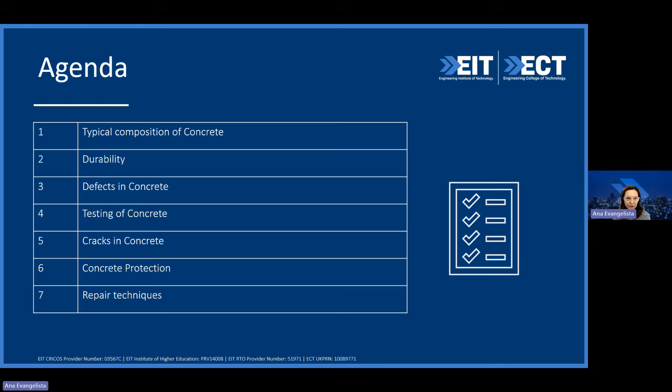So the main point today is to understand deterioration in concrete, because you have existing structures and sometimes new constructions showing significant defects and deterioration in a very short period of time. Just to highlight, when we talk about concrete here, concrete is a composite material.

At the end of the day, we need to understand the characteristics of each component. I'm sure you're totally familiar with this material, because concrete is one of the most used construction materials around the globe. It's a combination of cementitious materials, normally combined nowadays with cement Portland plus any type of pozzolanic material such as fly ash or silica fume, depending on the country. We also have fine aggregates. We cannot forget air is part of our composite, water, and coarse aggregates.

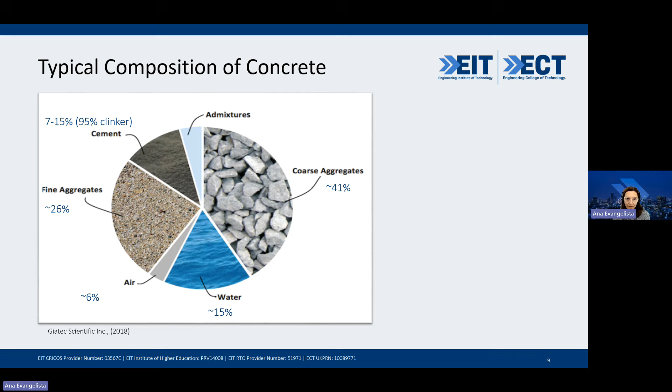Usually, modern concrete incorporates chemicals, right? Chemical admixtures and mineral admixtures. So when you have all these combined, we can identify a variety of characteristics of the final product, and the final product is concrete. So just to illustrate this initial part.

So when we think about existing structures, we need to understand a bit more in terms of durability aspects. When you talk about durability, straight away you need to think about concrete quality. It also relates to the design, concrete design, and the service life of this material over time. We ask ourselves why in some situations we have severe deterioration of concrete, which in future will require more investments in terms of repair, strengthening and maintenance.

So we have some simple factors to consider here. It can start at the design stage, or in terms of very poor, bad specifications and workmanship. Unfortunately, in the construction industry we still need lots of training for our laborers, right? I'm based in Australia, but I'm from South America, and we can identify this type of issue everywhere.

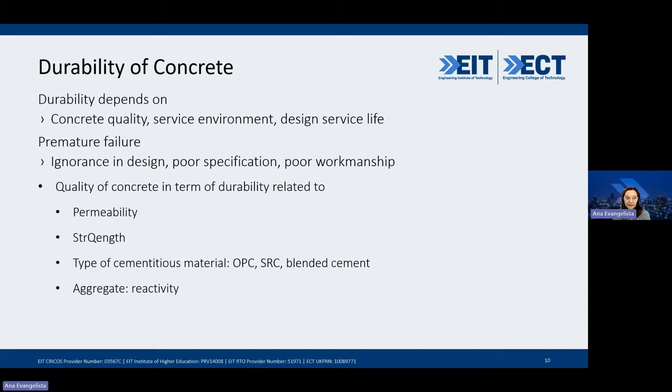When you think about quality of concrete, we have a combination of characteristics to keep in mind: permeability, strength. We have the concrete components, as I mentioned, depending on the type of cementitious materials. More and more we are working with a combination of cement Portland plus pozzolanic materials and selection of aggregates. So we need to understand these are the fundamentals of durability.

A bit more here in terms of concrete permeability. Why do we need to understand this? Because this will provide us the fundamentals we need in order to understand what happens in future in relation to simple defects such as cracks, which you're going to be talking about later on.

So permeability in concrete depends on the porosity of this material, the pore size distribution, and the continuity of those pores. For example, if your structural element is in front of the sea, it's about the ingress of chlorides. Another factor that deteriorates concrete is carbon dioxide, the carbonation of concrete.

So in my opinion, we need to do our best as civil structural engineers, or if you're working with concrete technology, to ensure that you produce high quality material. Because then you can avoid, or at least postpone, this type of defect from occurring. It's much better to dedicate effort and time to produce high quality concrete rather than do repairs in future. It's about prevention. If you understand the concepts of how to produce high quality concrete, you can minimize defects from happening in future.

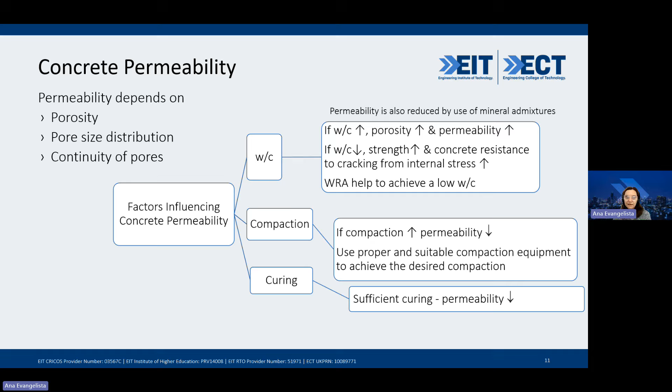Thinking from a structural point of view, aesthetics concerns us, but mainly structural integrity. Consequences of this type of chemical attack include expansion and cracking, which can result in collapse of the structure. So how can we minimize this from happening?

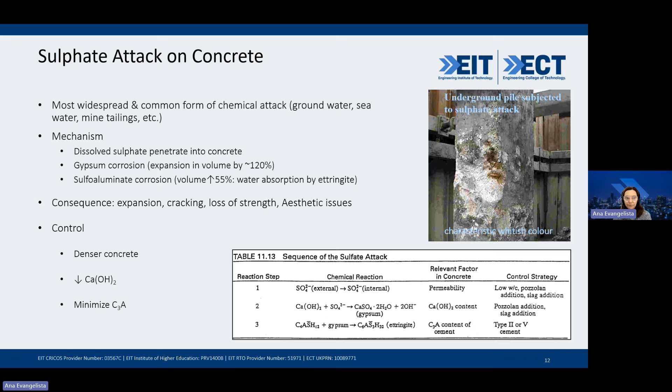Control measures here in order to avoid this happening: denser concrete, when it comes to our concrete mix design. With a proper mix design, we can produce a denser concrete and reduce permeability. We can try to mitigate the increase of sulfates and minimize the amount of tricalcium aluminate. So these are some points we can highlight about sulfate attacks.

Another problem we talk about here is shrinkage, because in the future, when thinking about repair of concrete, we need to understand why cracks occur in concrete. Shrinkage is one of the main challenges we face when working with concrete, because it starts from the fresh concrete.

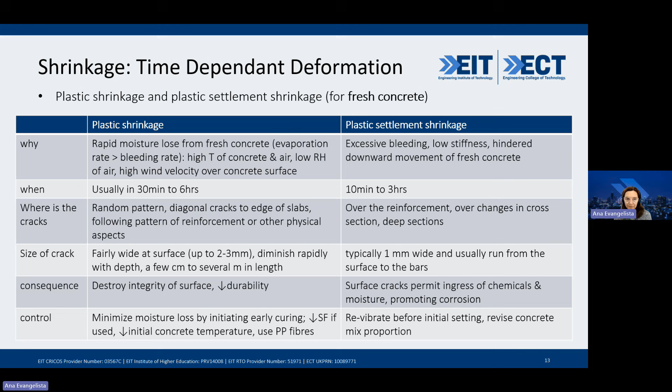Here I'll just illustrate, I won't go into details one by one, but when you talk about shrinkage, we need to understand the different types of shrinkage in concrete. It goes from plastic shrinkage, when it's in fresh concrete, but you also have dry shrinkage, which is easy for us to visualize.

Concrete just shrinks over time, and you can imagine why cracks happen: because the concrete strength is not at the level needed in relation to the internal stress applied in the concrete. That's why you have crack formation and propagation.

The cause, if you have a keyword here, dry, is about loss of moisture over time. Parameters we can observe in order to prevent this depend on the geometry of your structural element.

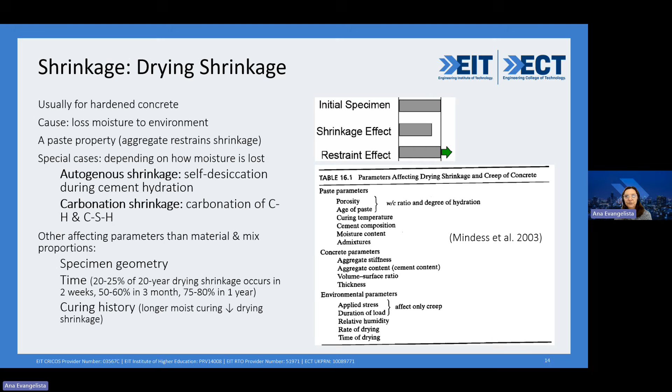We also need to think about the curing condition. It's clear, and so many researchers have proved this, and in real life you can also get this evidence: when you have a longer moist curing period, you can observe the mitigation of drying shrinkage.

So on top of plastic and drying shrinkage, we need to be very careful depending on the location of your project in terms of the temperature.

So in high temperature or fiery conditions, no doubt you have a reduction of strength, because concrete has limits in terms of fire resistance. So we have decomposition of the hydration phase.

So that's why we can identify gradually the deterioration of concrete, and it can go to the level of aggregate, and stress concentrations result in cracks.

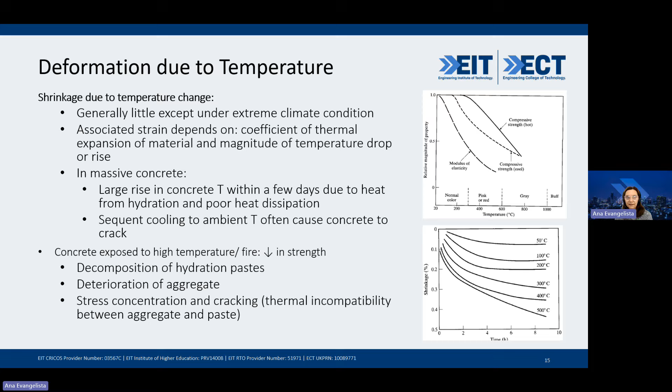This is about shrinkage, occurring from plastic shrinkage, dry shrinkage, and depending on the temperature, exposure to temperature. Here is more to show you how shrinkage can look like. Cracks can occur depending on improper curing.

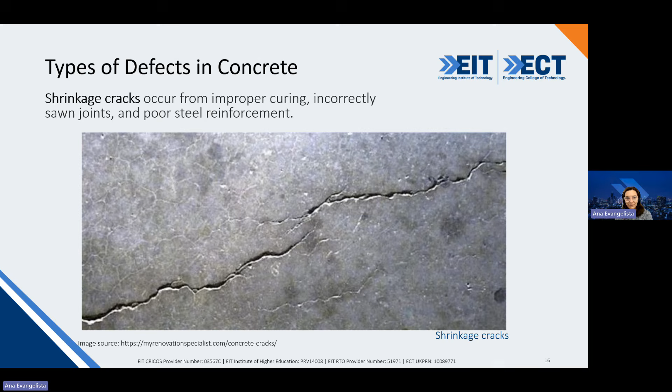So just to summarize why we covered shrinkage: we need to understand this type of defect occurs considering improper curing, or it can be problems in the joints of your project, your structural design, and steel reinforcement, poor steel reinforcement, because cracks are results of lower tensile strength of concrete. That's why we need to understand the fundamentals of concrete.

There are so many other durability issues that I can't keep talking for more than 5 hours, but today you have 50 minutes, more or less.

So we have acid attack, alkali aggregate reaction. Can you give me some idea if you are familiar with those other types of durability issues? Just a thumbs up if you are familiar with those. Alkali aggregate reaction, corrosion - I think you're going to have lots of thumbs up.

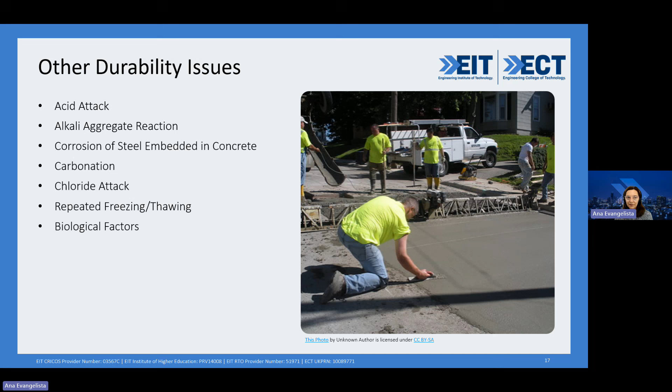Everybody knows about corrosion. Carbonation, when you have ingress of carbon dioxide into your concrete structures. Chlorides, freeze and thaw cycles, and biological attacks as well.

Here is another illustration, just for you to have an idea about efflorescence. It's a salt deposit. I think all of us, when we identify this type, it can be, I can say, an aesthetic issue, but not only that. You can see it's visually unpleasant, but this is a red flag. Straight away you can identify something must be done here, right?

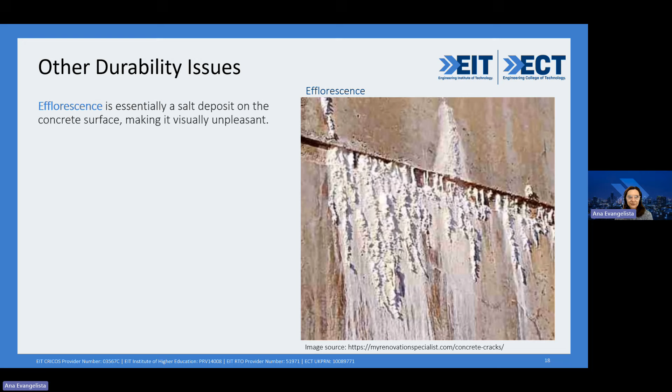Otherwise it can progress. If it progresses, in reinforced concrete the corrosion will start in a very short period of time, or it may have already started, leading to cracks formation and propagation. We're going to talk a lot about crack formation and propagation.

We're going to get there on materials and repair techniques. I'm going to answer your questions as soon as we get to the end? Just so we don't compromise on time.

So in terms of structural deficiency, inadequacy in construction flaws, the majority of stress can be caused by - that's why I mentioned it's a combination of factors, not just one. It's about the lack of sometimes skilled laborers and the lack of quality control in our materials. It's about construction practice, with the majority of stress on beams.

It can also be not using the proper concrete mix according to the application, or the level of loads applied can also cause some damage. And finished detailing, as you can see, deficiency in structural elements can be caused by different factors, but most of the time they are all combined. It's very hard to identify only one factor affecting the structural deficiency.

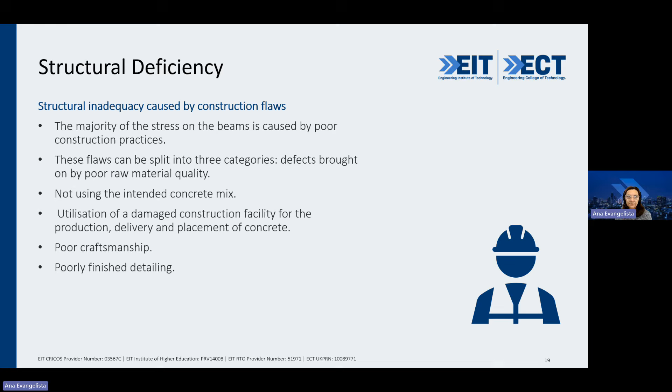So as you all know, in order to ensure what's happening with the concrete in situ, we have some types of tests that you can conduct. For today I just mention this one in order to identify the level of strength in situ, but we also have ultrasound and some modern techniques that give us inputs on the characteristics of concrete in situ.

Here is about the rebound test, just to illustrate that we can obtain the characteristics of concrete in situ using different types of non-destructive tests. We need this during the inspection phase in order to understand the level of repair that you may need.

As you asked how to fix it, the efflorescence - sometimes it's more about the aesthetics, but if you dig down and understand the level of strength of the concrete in situ, it can become a need not only for repair, but for strengthening as well.

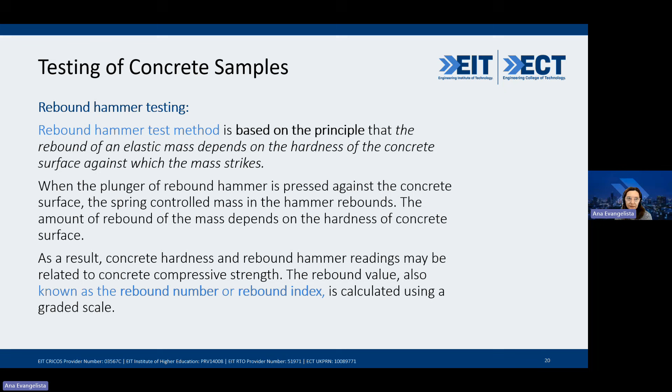The other point is, just to illustrate more, we need non-destructive tests and other techniques to analyze what's happening with the structural element, and then we can prescribe. It's like when you go to your doctor - first you need to understand what's happening with you, and then the doctor can prescribe the treatment, right? So we cannot jump to the treatment if you don't know exactly the cause, and that's why this is the investigation phase.

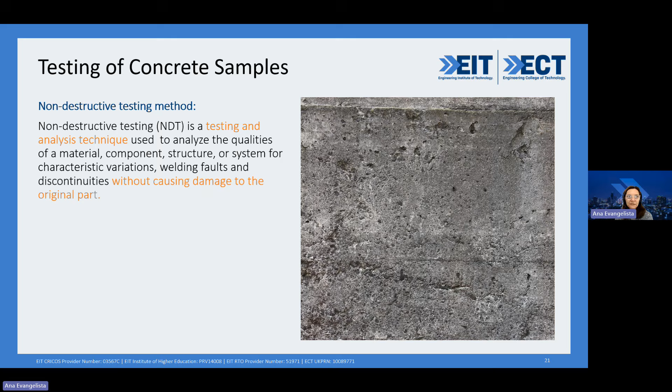So it depends on the system - it can present some discontinuities, and then we can have the cracks. Yes, now this is how you can understand the reasons for cracks.

We need to ensure why curing is important to avoid crack formation. As I mentioned at the very beginning, we have our concrete mix, delivered in situ, and over time you can see the strength development gain. When you have the critical 24 hours, 48, 7 days, if you ensure the moisture in your concrete, you can ensure proper strength development gain. When you do this 7 to 10 days of proper curing process, the main point is to minimize the probability to observe cracks in the future in your concrete.

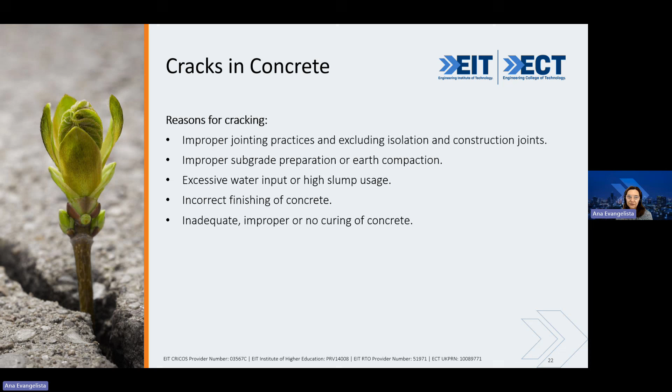If there's no proper curing, this is a very simple control that we can just pay more attention to when you are a site engineer, for example. Incorrect finishing, excessive water - why excessive water? Because, as we covered before, we have drying shrinkage as another cause of crack formation.

But now let's look at the construction practice. What can be done in order to minimize crack formation here, based on construction practice? When you have the workability of concrete, it's very common if you don't control the amount of water in your mix design, because the majority of us, when you are a site engineer, you want your laborers to work easily with concrete. That's why workability is critical.

But at the same time, if you don't balance this, you observe an increase in the amount of water to make concrete easier to mix. This will lead to a reduction in strength and increase the settlement of concrete. Plastic shrinkage and dry shrinkage - just observe they all occur at the same time, right? Not separately.

The other point is about gradients in temperature, which depends on your location. For example, here in Perth, it's summertime - during the day we go up to 40 Celsius, and during the night, 15. So these gradients can also affect the quality of our material in terms of temperature, especially when doing concrete work during severe conditions.

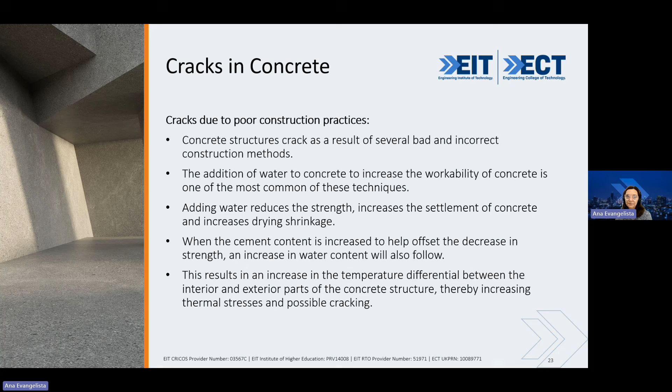So it's better to ensure a proper procedure during the construction stage.

Cracks in concrete - we mentioned at the very beginning about concrete as a composite material. More and more we know that when you have cement Portland plus water, it's a chemical reaction, an exothermical reaction. That's why when you replace part of the Portland cement with fly ash, for example, you can have mitigation and observe some reduction in terms of the heat of hydration. All this can reduce the probability of cracks in your concrete.

Also, during the hydration, when you think about long-term characteristics in terms of strength and durability of concrete, everything you pay attention to here at the very beginning will ensure a long service life of your structural element.

Another point that can lead to cracks is about formwork support, consolidation, placing, and joints in high stress areas. So sometimes the problem starts in the design, the structural design. If you don't have proper reinforcement in critical areas of stress, you all know that you're going to end up with crack formation in the future because of the excessive stress.

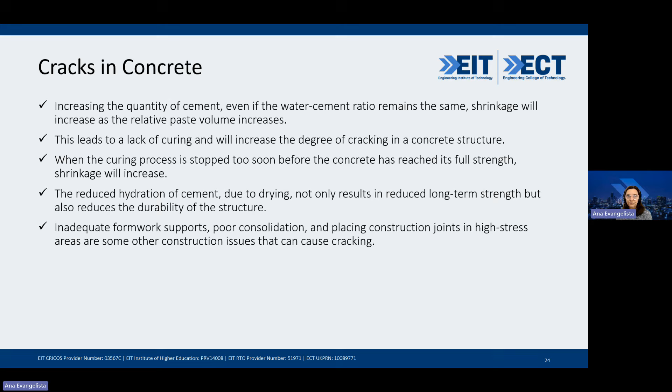That's why I highlight, as mentioned before, the summary in terms of errors in design and detailing, especially when you have corners, or even with precast elements. You also need to observe this type of cause that can lead to cracks.

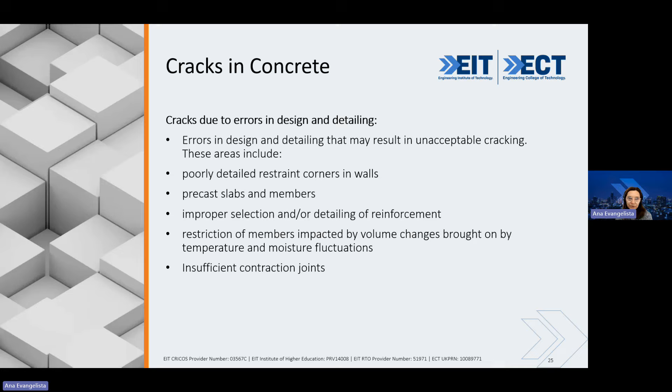In the contraction joints, joints are critical. If our material needs some joints, but concrete will deform over time, we know this. And if you don't have a proper joint, what's going to happen with the concrete? There will be some stress generated there. If there's internal stress, this will lead to cracks. So all those are important points to keep in mind.

Here you have some other points, for example the last one. Let's get this one. If you have slabs or walls and they are restrained, even if they are pre-stressed, they can develop tensile stress. This is what I'm trying to highlight here. Let me make this a little bigger. Tensile stress is the cause of cracks.

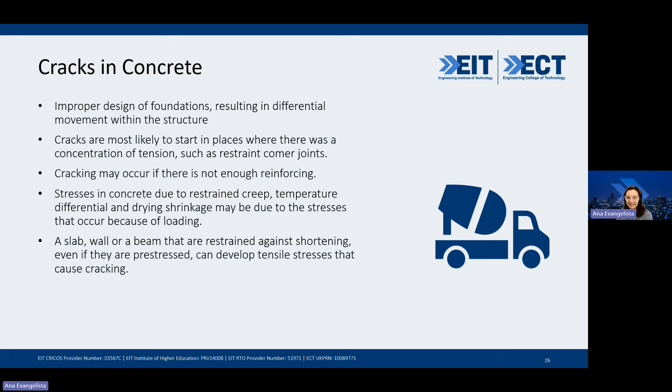And why do we need to know this? Because we need to know how to fix it. In order to fix it, we need to ensure the concrete will recover the capacity to resist tensile stress. This is the weakest property of concrete. Concrete is not the best material to resist tensile stress, right? You all know this.

So here you also have differential movements. Very small cracks can occur. This is another point we need to keep in mind. Sometimes with differential movement and settlement, the structure cannot redistribute loads. If the structural element is not capable of redistributing loads, it ends up in failures.

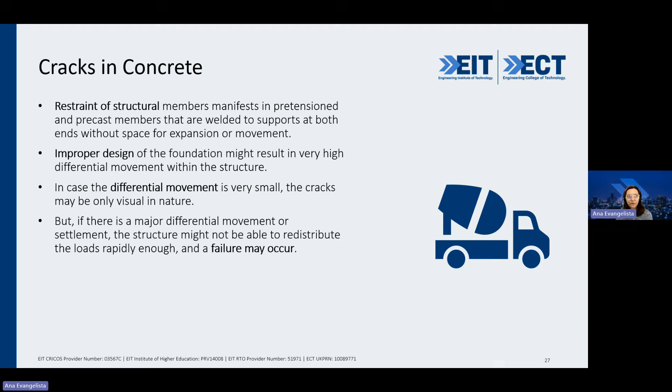So that's another cause. Now we're going to talk more about the repair methods until the end - methods, materials - but now you understand the causes. Now we can have a better understanding of how we can treat it or try to fix it as much as possible. The system has some fundamentals.

We selected 7 fundamental steps for repair methods. Step 1 is to identify the damage, otherwise how can we prescribe solutions and treatments. Severity of damage, as we could see, can be simple with efflorescence - you can clean up and apply another layer of concrete, mortar, or grout - but depending on the severity, it can go to the structural level.

So there's necessity for repairs by doing some in-situ inspection, and then combining all this we can do some analysis and identify a suitable technique and materials in order to repair, or if it's the case, to enhance the strength of the structural element. You can have strengthening techniques as well, and start with a strategy and complete the cure of repair.

Okay, when you are working with new concrete, you need to ensure a proper curing condition.

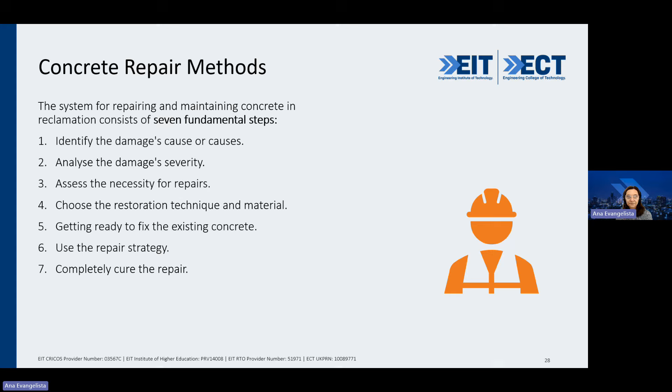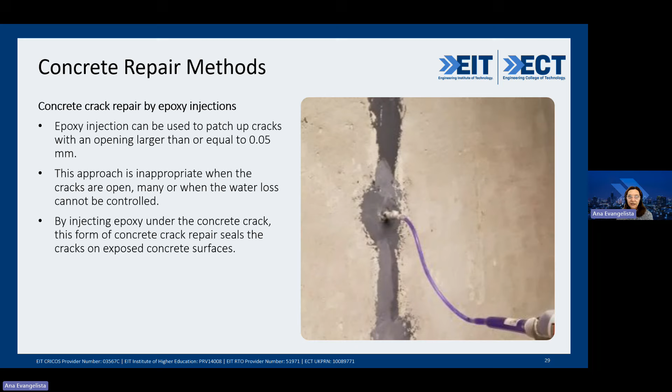So in terms of repair methods, one of the most traditional ones is epoxy injection. It depends on countries and locations - you have a variety of materials available, different epoxies that can be used to seal the cracks. Epoxy injection is one of the most traditional ones, sealing the cracks on the exposed surface. So epoxy injection is one of the alternatives.

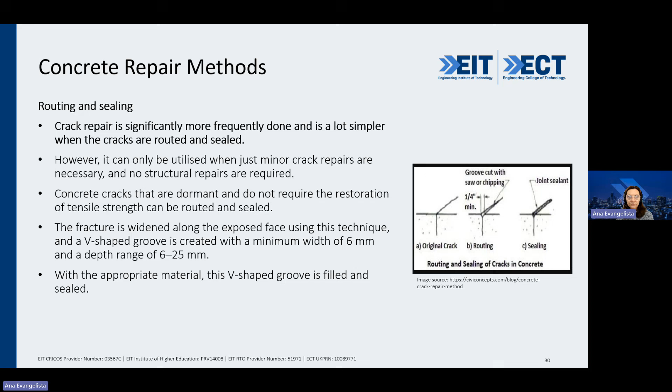Other techniques are more modern ones I selected to share with you, but I'll share this video with you later since it's not very short. I think in terms of trends and modern technology, especially when working with pre-stressed concrete beams, this is a very cutting-edge technique - researchers working with ultra high performance fiber reinforced concrete. This is one of the modern techniques you can use.

Sometimes modern techniques still need time to come to life and be applied in the industry, but it's important to highlight new materials. Ultra high performance fiber reinforced concrete can fix very small cracks and post-cracking behavior. This type of material ensures both mechanical properties and durability, exceeding traditional concrete characteristics. I want to highlight this later, and you'll have an opportunity to watch a video about it.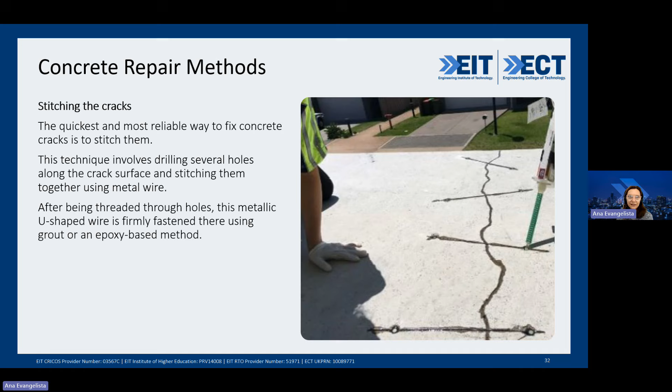Other options I selected to share with you in terms of repair methods is stitching cracks. This is one of the reliable ways to fix concrete, like a stitch, as you can see here. If you have faced this before, had some experience in your workplace, or had the opportunity to visualize this type of service, please let me know, yes or no in your chat box. This is something that can be done in terms of methods.

In terms of repair techniques, I illustrated some of them, but now you can see the full list. It can go to the level of voids in concrete when you have porous concrete, majority of the time involving injection of resin. Other techniques include cut and repair, when you have cracks from the top of the reinforcement, majority of the time it's a question of recompacting the concrete when it's still plastic. Some alternatives can be done when the concrete is still in a fresh condition.

And for lack of cover, we can apply a solution for lack of cover. Why is it a problem, lack of cover to reinforcement? Can you put in the chat box why it is a problem? What is the consequence? Why do you need to apply a protective coat? Think about this consequence of lack of cover. Yeah, 100%, really nice.

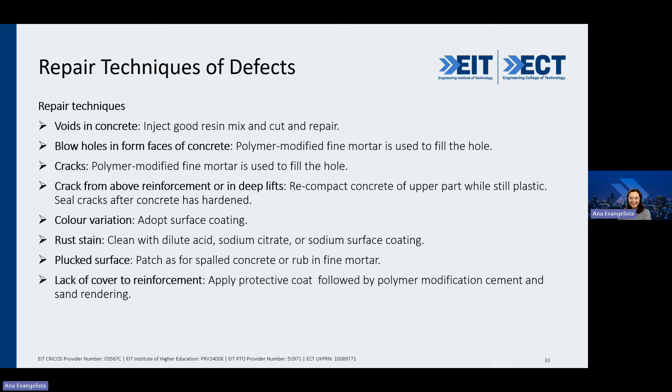This is another problem you can see here. What's the main issue about lack of cover? As I can see, there is no miracle here. If you start from when concrete is delivered in situ, and if everything is done properly, you can mitigate all this. Repair will definitely be needed eventually, but you can postpone this.

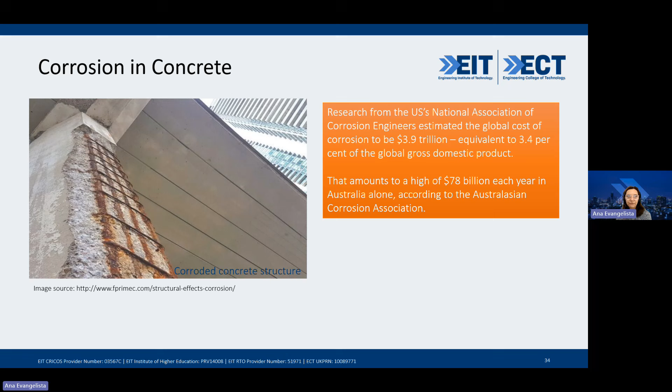So corrosion, this is another critical part. Corrosion, as you can see here, is not only about aesthetics, it's about deterioration of your structural element, structural integrity, and the cost of corrosion. Engineers are trying to work with new coating materials just to mitigate this situation. In a very severe environment, you can imagine the difficulties to inhibit corrosion and the amount of money required for this. So corrosion is one of the main factors of deterioration in concrete.

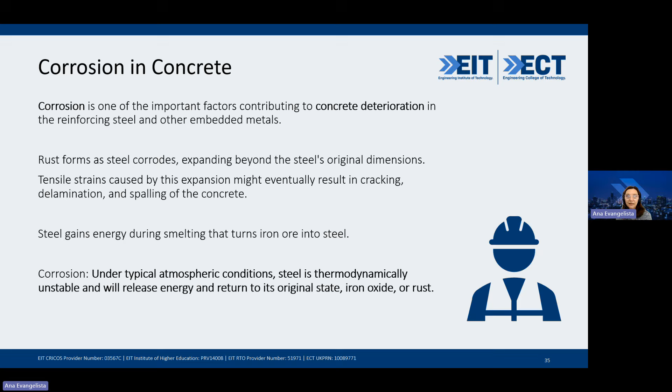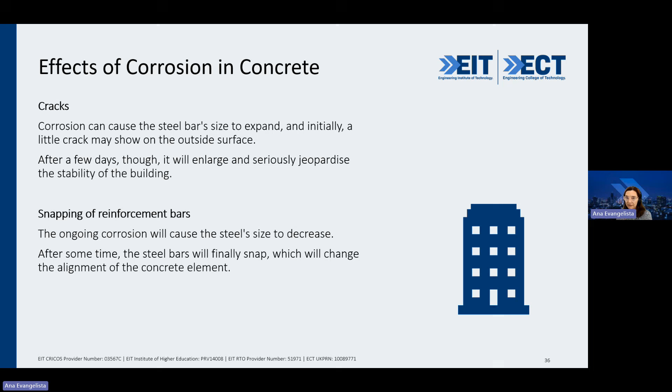It depends on the severe environment, but steel is thermodynamically unstable, and that's the corrosion mechanism. Why are we concerned with corrosion? Because it ends up causing cracks, right? And the cracks, even starting small, if they progress, compromise structural integrity. And if you compromise structural integrity, we don't want the collapse of our buildings or bridges. This is the main point for us.

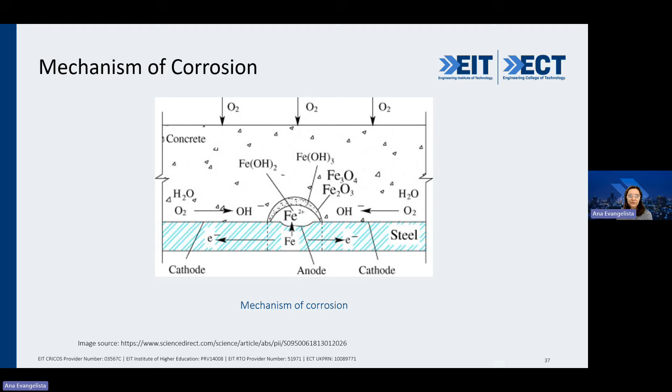You have some illustrations in terms of corrosion mechanisms, which you'll have for you to understand in detail later on. But you all know that with concrete, if you have lower permeability, lower porosity concrete, it acts as a protective layer for your steel. But when it deteriorates, when you have oxygen, water ingress, or chlorides, the corrosion process starts. So this is one of the points and stages of corrosion, some illustrations for you.

But as you know me, you will really understand why I highlight prevention, because you avoid excessive cost in future. So prevention of concrete corrosion, the quality depends sometimes on contaminants in your materials. I'm not sure if you heard about it, but sometimes buildings collapse in cities with coastal areas, because sometimes the sand, simple as that - we cannot imagine that it happens, but if the material used is sand with lots of salt, what's going to happen with your reinforced concrete?

So clear cover, epoxy coating depends on the type of project, the complexity of project, the severity of the environment, your structural element to be exposed. You can go to this level of epoxy coating in order to reduce or mitigate as much as possible the corrosion process.

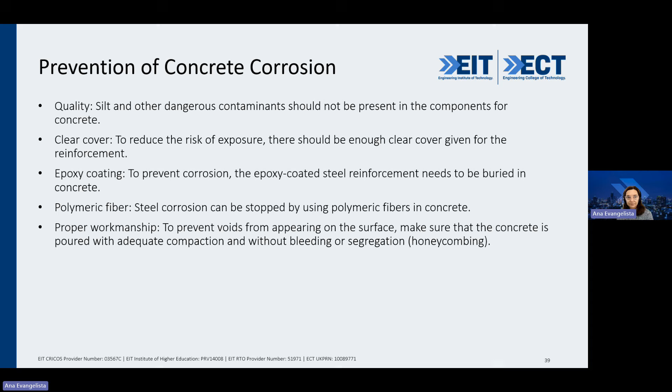And yeah, here are some techniques for testing. We have the half cell potential - this is what I was trying to explain before when you asked about the correlation between corrosion and strength. So there are some techniques in situ that you can understand the level of corrosion, and you can have a contour map of the corrosion.

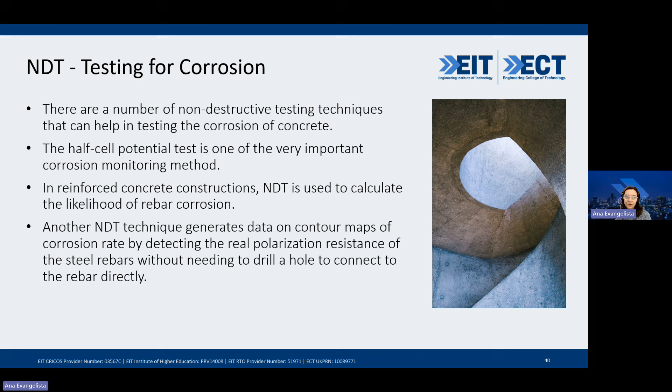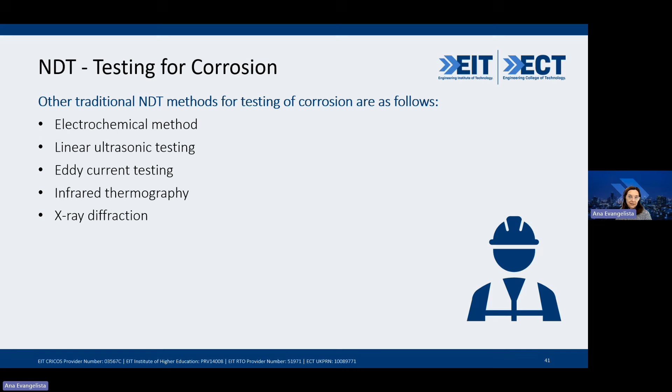We can map everything in situ, without the need to start drilling holes and causing some damage in your structural element. Here we also have other examples for you to evaluate corrosion in terms of ultrasonic testing, eddy current testing, infrared thermography - as I told you, non-destructive tests now. You have so many new equipment coming to industry, in order to identify all those defects in situ.

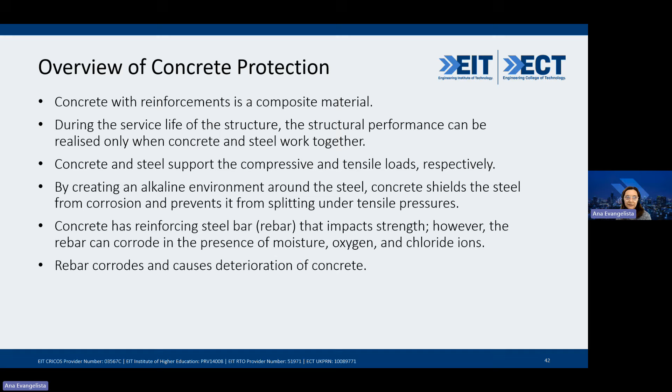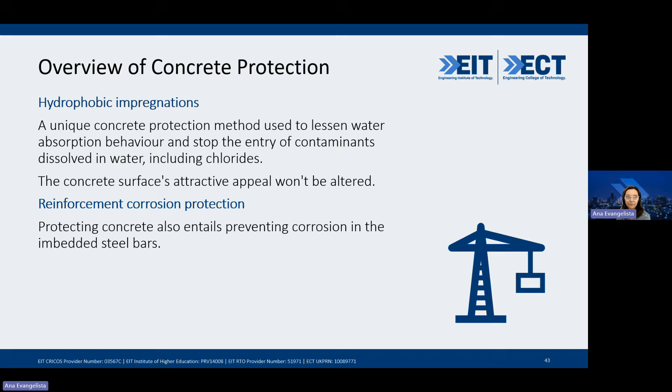In terms of protection, concrete with reinforcements is the composite material - concrete is the one that protects the rebars. There's nothing very difficult in this sense to understand, but other techniques here in terms of protection are hydrophobic impregnations. So why do we need this? In order to ensure that we don't absorb significant amounts of water from humidity, to stop the ingress of contaminants. The common type of contaminant is chlorides, depending on the environment. So protecting can prevent, then the concrete naturally protects the steel bars.

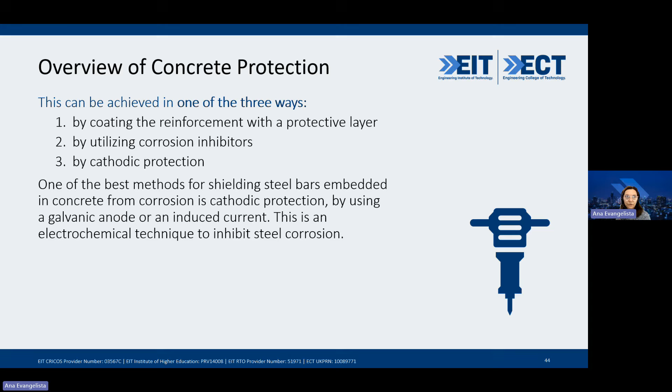Also, this type of protection can be achieved in different ways: by coating, as we mentioned before, and another technique is about the application of corrosion inhibitors and cathodic protection. So all those are good alternatives. Let's have a look one by one.

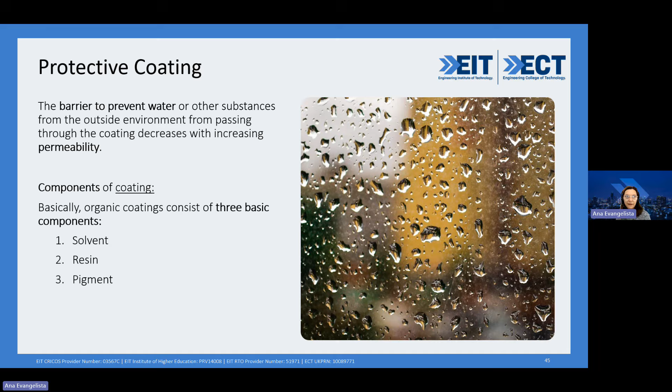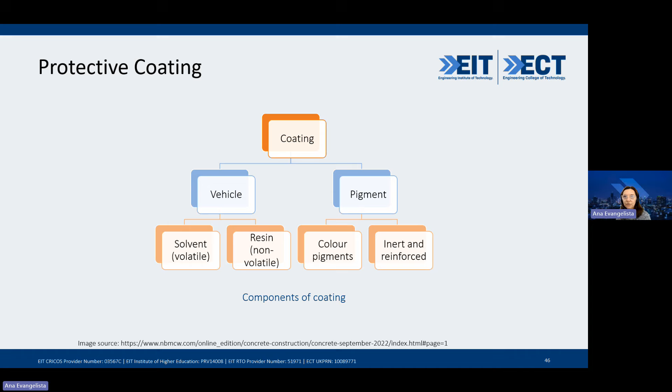Here we have protective coating. As we can imagine, it is pretty much to ensure prevention of water ingress and other contaminants. So it also has some components - these protective coatings are based on solvents, resin, and pigments. Those are the main components. When you talk about coatings, we have the vehicle - vehicles are the solvents or resins, and the pigments can be color pigments, inerts, and reinforced.

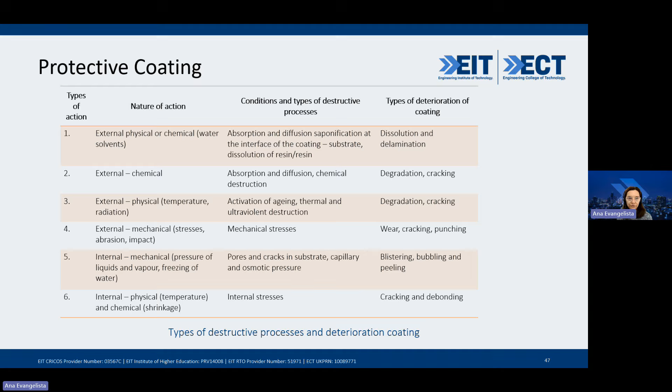Sealing concrete is a protective covering that can use a sealer like acrylic or epoxy to ensure that you minimize or mitigate the amount of water ingress or contaminants. These penetrating sealers have a resin or similar, and in a porous surface it can build up here and become a protective layer.

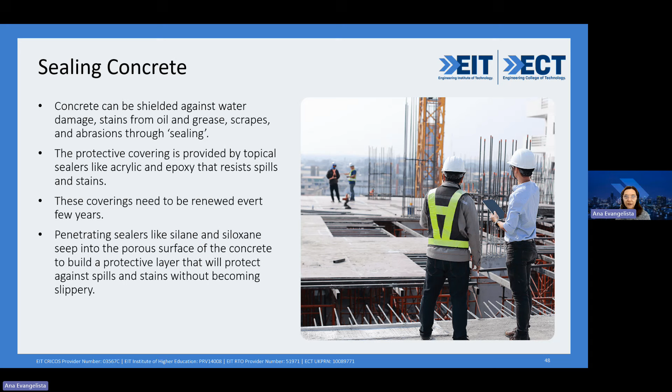So there are some different options here to seal concrete. In terms of specific applications and sealers, I'll just provide some examples of resin-based options like acrylic and styrene acrylic.

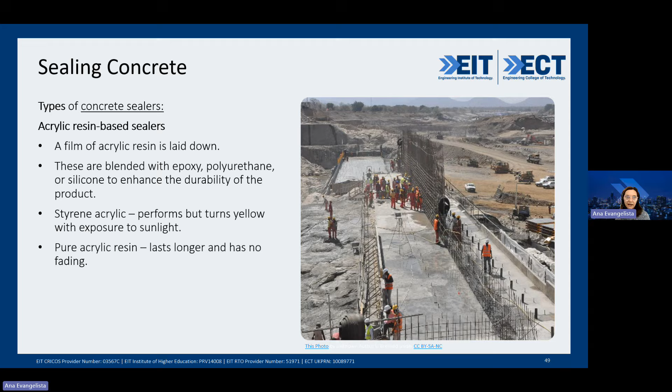As I mentioned, you just need to understand the techniques, but the materials available depend on the suppliers in your specific country and location. I encourage you, step number one, to understand the cause of why it happens, and then familiarize yourself with the materials available to repair the concrete if you are facing this type of issue.

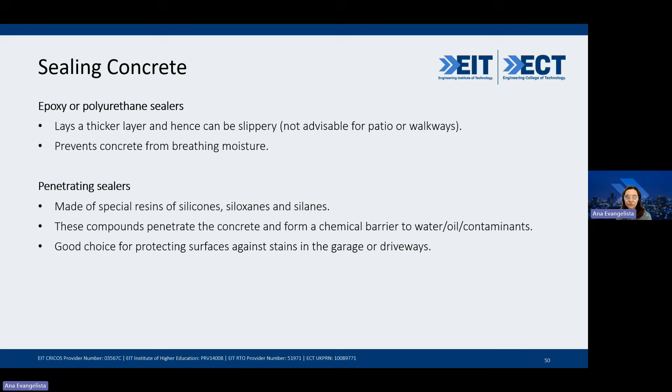Then you can have better knowledge to select the type of material according to your need. We also have epoxy and polyurethane sealers, as well as penetrating sealers based on resin silicones. These are a good choice when you have the surface against stains in a garage or driveway, so it depends on the circumstance.

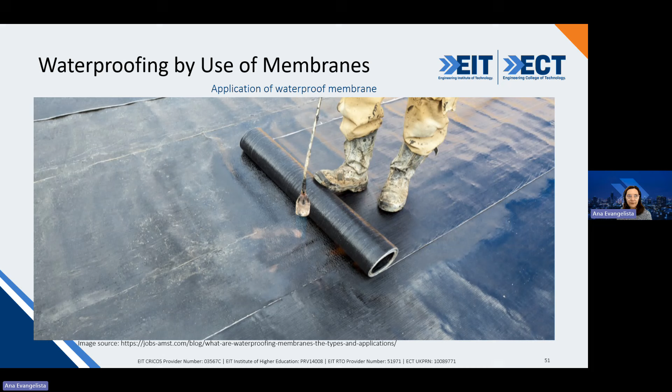The main challenge is to avoid ingress of contaminants and excessive amounts of water. So waterproofing is one of the simple alternatives, depending on your project. We have here applications of waterproofing. Why is this important? Because this is the only way to protect the concrete from deterioration over time, by avoiding the ingress of chemicals and contaminants.

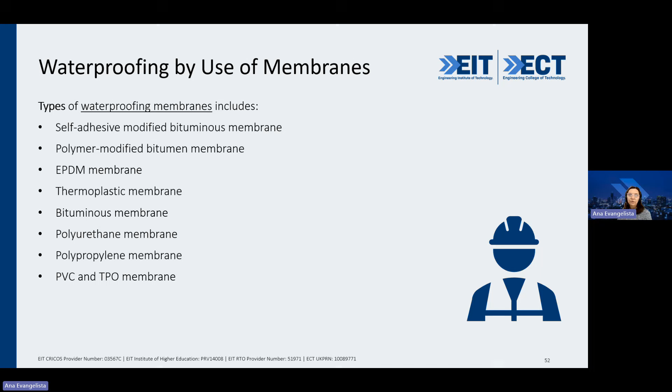There are a variety of waterproof membranes based on polymers, bituminous materials, or PVC. Again, it depends on what type of materials are available in your countries and cities.